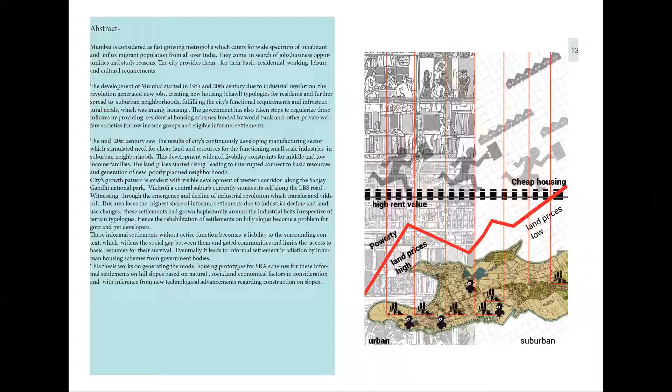The thesis works on generating model housing prototypes for SRA schemes for these informal settlements on hill slopes, based on natural, social, and economical factors, in consideration with inference from new technological advancement regarding construction on slopes.

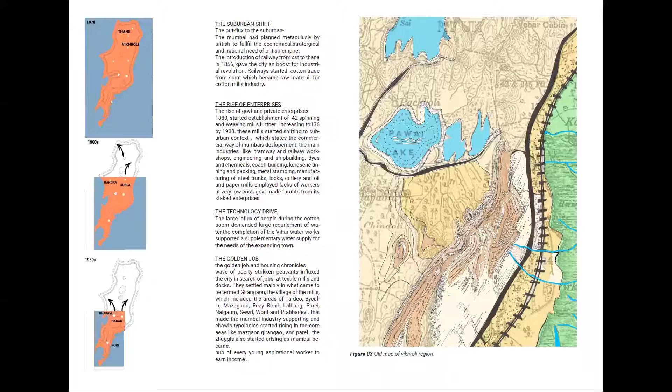The basic causes of shift are high land prices, cheap and better housing options in suburban contexts, and new small-scale industries in the Vikhroli-Mulund belt.

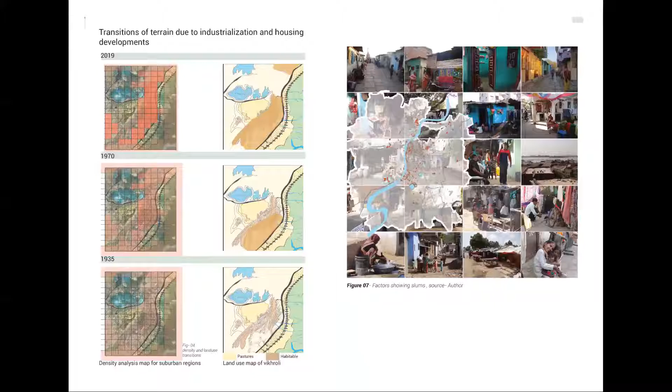The left side map shows the density of the Vikhroli region from 1935 to 2019. It shows a considerable amount of density increase.

The slums. While designing the slums, the following factors should be taken into consideration: society, work, family, habitable land, and ownership.

The SRA developments have their pros and cons. The cons are that the process is lengthy, with a lot of waiting, hence it's not up to market demand. The basic resources and facilities are not well thought out, and the residents are unable to maintain it after construction.

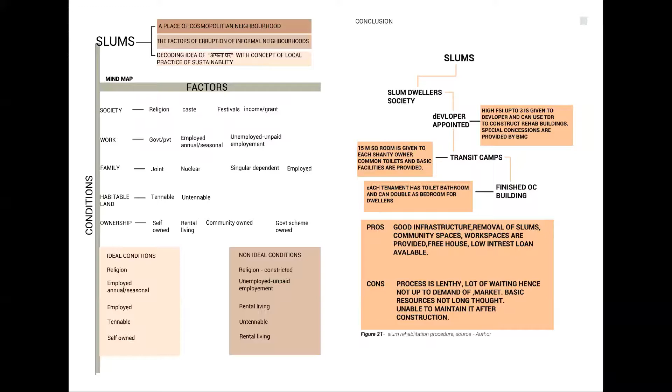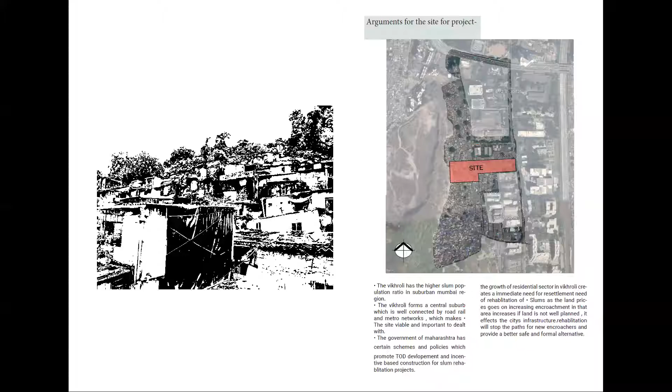The site is located in Vikhroli, which forms a good central suburb, well connected by road, rail, and metro networks, making the site viable and important to deal with. The government of Maharashtra has certain schemes and policies which promote TOD development and incentive-based construction in these areas.

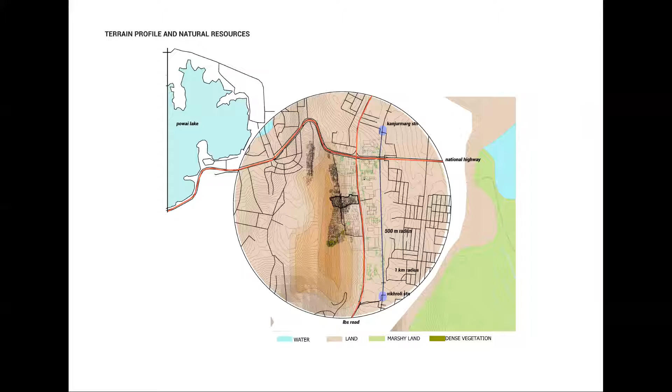The site is located on the foothills of the Mulund-Ghatkopar mountain belt, connected by the LBS road and to the EEH on the east and JVLR on the west. The site is situated between Kanjurmarg and Vikhroli, and is mainly a terraneous land which drains itself on the east side into the mangroves.

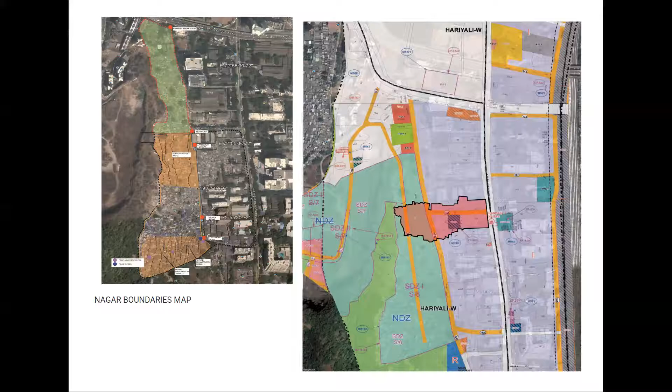The left side map shows the Nagar boundaries. The site has two Nagar boundaries coinciding: one is Ambewadi and the other is Suryanagar. The site has two types of reservation: one is industrial, in Suryanagar and Ambewadi, it is SDZ second zone.

Hence, the east side of the site has haphazard cutting of the mountain, but on the west side it is a kind of untouched land. The site drains into the eastern creeks of Kanjurmarg.

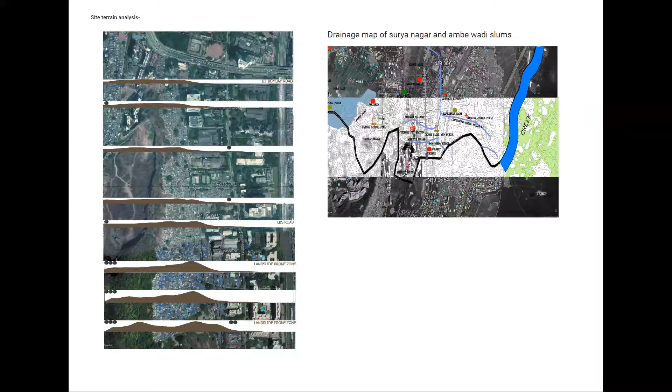The left side map shows the terrain study of the site, where it is divided into three kinds of slopes: the steep slope, the medium slope, and the shallow slope. The site ranges from 13 meters to 55 meters.

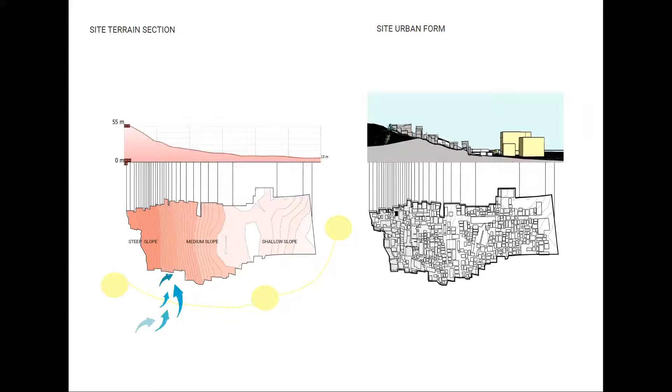The site has the slum typology in its present context. The left side diagram showcases how the site was a stone quarry, and after haphazard cutting of the stones, the site has become a hazardous kind of living condition for the slum dwellers on the other side of the mountain.

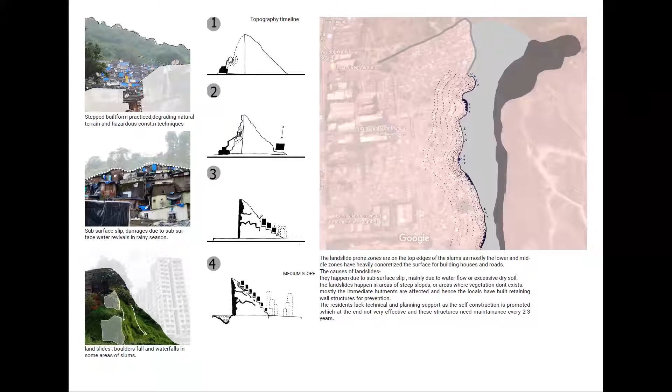The landslide-prone zones are on the top edges of the slums, and mostly the lower and middle zones of the slums are fully concretized. Hence, they do not experience any landslides, but the topmost slums do experience them. The site area is 4 acres.

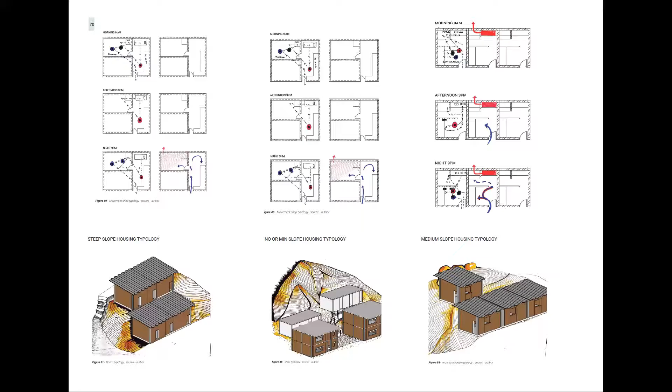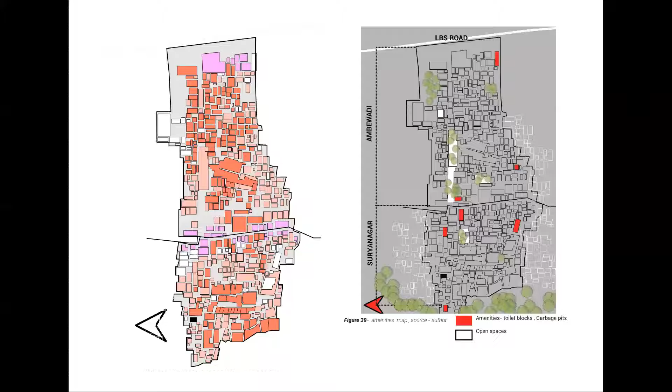The left side map shows the build form. It is mainly a G+1 kind of build form with small scale industries shown in purple. The other map shows the amenities and open spaces currently available on the site, and the religious context in the site.

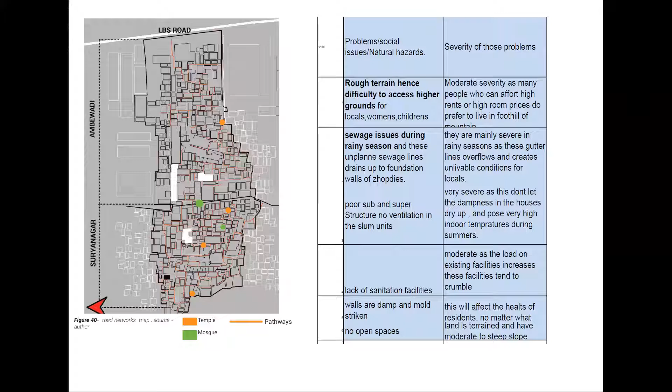Concluding, there are various problems like rough terrain, making it difficult to access higher grounds in the site. There are sewage issues, lack of sanitation facilities, the walls of existing structures of the slum dwellers are damp and mold stricken, and due to the dense typology, there are no open spaces presently available on the site.

The design statement: the program will provide 300 square feet tenements for 750 families, and the remaining tenements will be for sale purposes. As far as infrastructure facilities, it will provide approach roads, drainage system, landslide protection system, treatment plant, water segregation plant, parking, recreational grounds, commercial activities, shops, community center, etc.

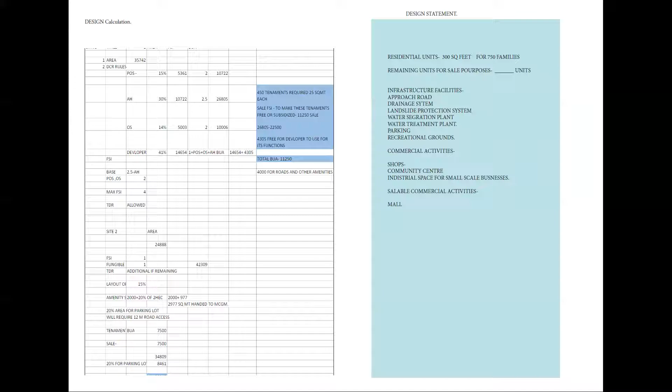The module development is based on terrain conditions. The module adapts according to the site. The key services are assembled and accessible through the site as main priority. The superstructure massing is designed to allow interim spacing and shared recreation spaces.

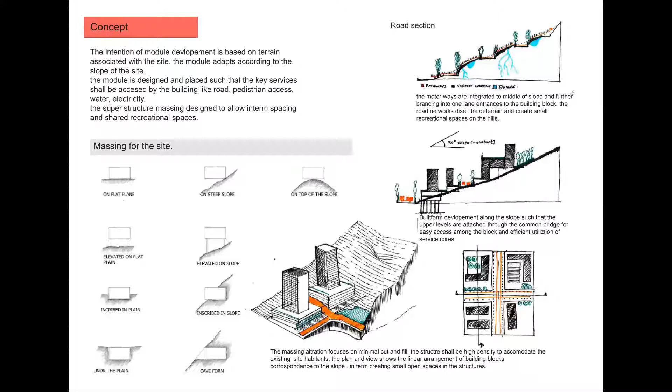The build form can have commercial spaces abutting the road, and an associated back typology which enables the building to respond to the terrain, creating multiple plinth levels in itself. The building structure connects road level with vertical circulation through the step form. The build form connects multiple road levels, enabling connection with the terrain and building at all levels.

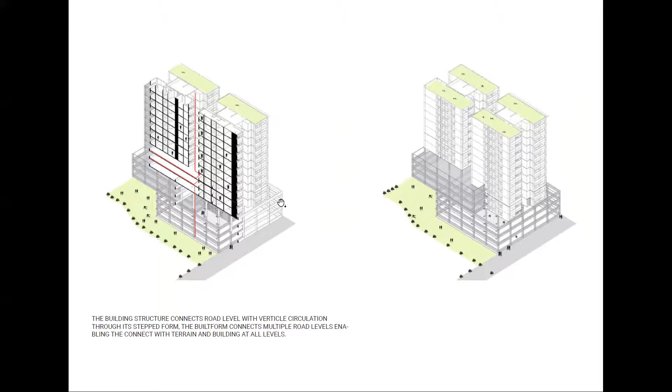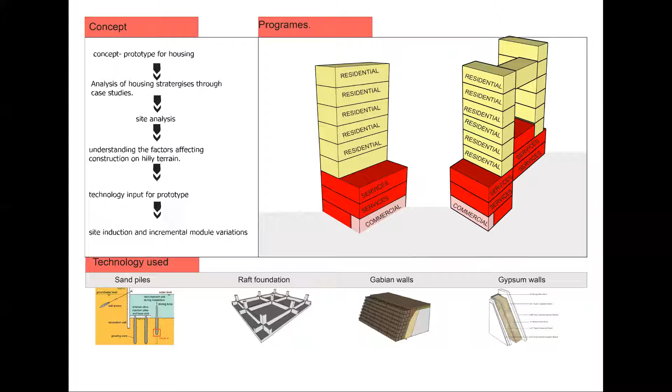The concept: the prototypal concept was basically commercial on the ground floors and a step pattern for the residential one. The technologies used were sand piling techniques, raft foundation, gabion walls, and gypsum walls.

First, the plinth design. These are the three buildings at lower, medium, and steep slope terrain. The above diagram explores the possibility of horizontal movement on terrained lands. The plinths are designed so that the minimum difference between two plinths is 1.5 meters and maximum 3 meters, where the 3 meter difference has the plinth adjoining the staircase block, and the 1.5 meter difference is covered by a designed staircase and ramp along the central spine of movement.

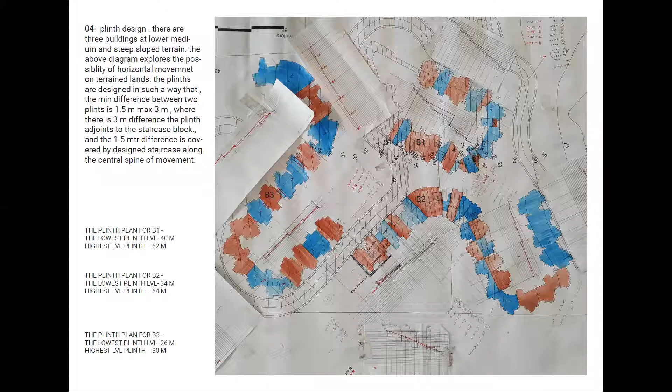For B1, the lowest plinth is 40 meters, the highest is 62 meters. The lowest plinth for B2 is 34 and highest is 64. The plinth for B3 is 26 and the highest is 30 meters.

Structures on an unstable slope with a uniform structural grid tend to deflect more from the load than a foundation on the same level. The above research paper concludes that a symmetrical level of stable foundation is preferable. In the above structure, the MF15 structure acts as the desirable option, with minimum deflection. These concepts can be used as structural input in my design problem.

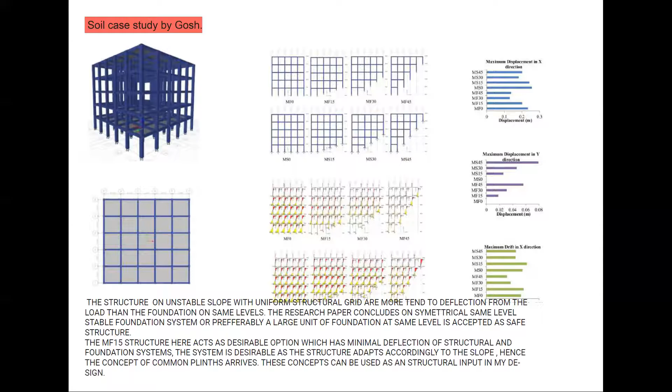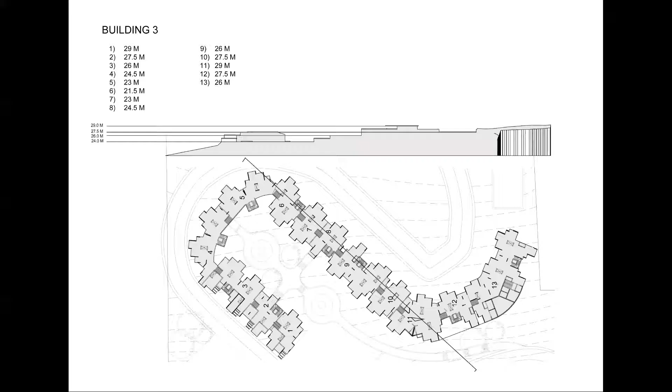Building 3 is situated on the low or minimum slope. Hence the building has an undulating plinth arrangement, starting from 29 meters to 24 meters, then to 26 meters, then again to 27 meters, and then to 26 meters. These small plinth divisions are due to the terrain conditions, as this building is situated on a low contour level. Hence the plinths are bigger compared to building 1.

Moving to building 2, it connects the medium slope terrain to the topmost slope terrain. It starts from 34.5 meters to 64.5 meters, connecting at 52 meters on the middle terrain, and at the top 64.5 meters.

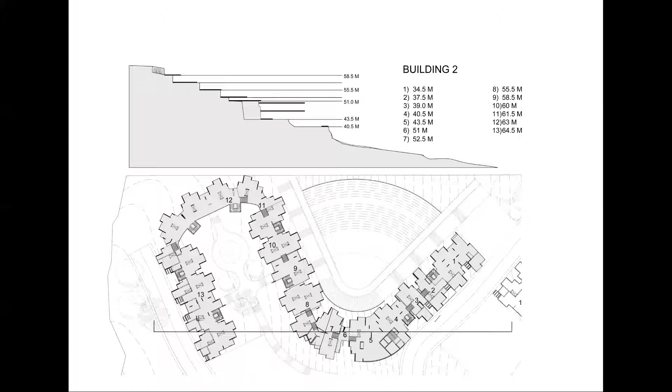This is the foundation plan for building B2, as the building is mainly situated on terrain land. It uses multiple kinds of foundations, like pile foundations placed at certain contour levels, which are in turn connected by the raft foundation for the plinth between the two pile foundations.

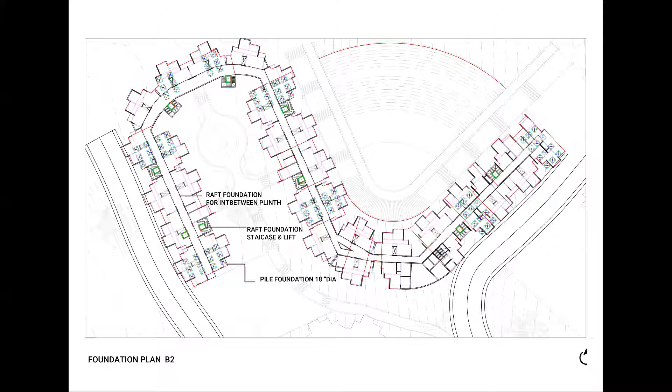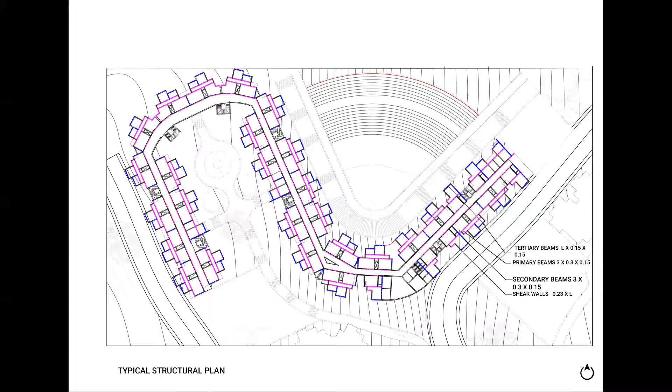Mainly, the primary beams run through the outer periphery of the structure. The secondary beams act as a connecting member to the primary beam and run along the inner circulation path, and the tertiary beams form windows and balconies for these small units.

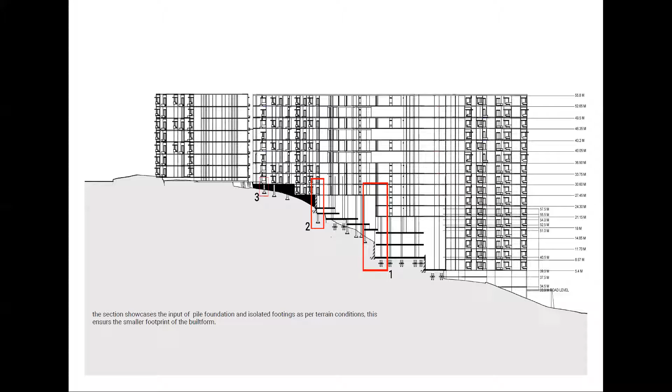This section showcases the input of pile foundation and isolated footing as per terrain conditions. This ensures a smaller footprint of the built form. The isolated footings are used in certain conditions, as these plinths are not at the same levels. Hence, a combination of raft foundation and isolated footing is practiced.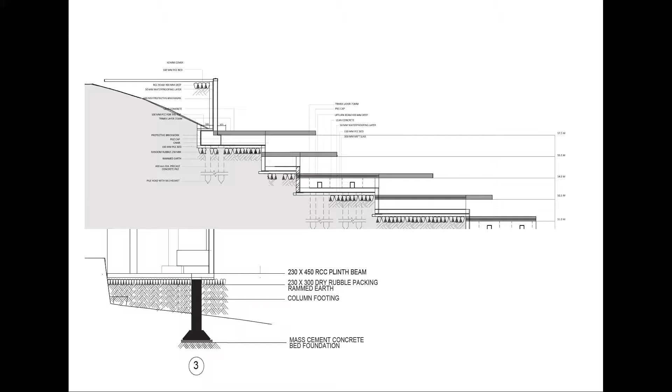The foundation is a stepped profile as the slope is very steep. The pile foundation on a raft is suitable, as these foundations are centric load enablers, since the piles are longer in the center than on the periphery. Hence, more load on residential floors can be carried compared with isolated footings.

This is the reason certain levels are piled while other levels use either raft or isolated footing.

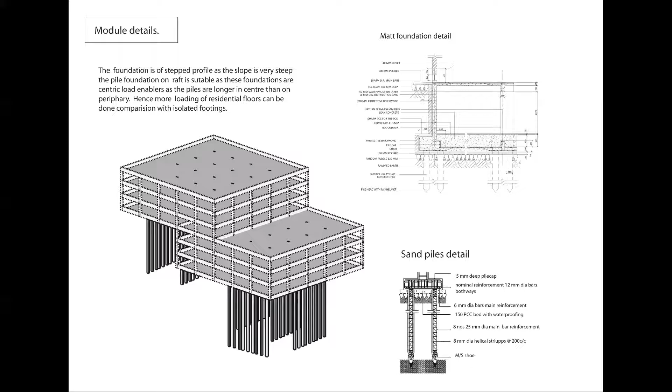These are the details of sand piles and mat foundation. This is the illustration showcasing the foundation system, consisting of micro pile foundation and combined footing.

The hexagonal pile caps carry load from the superstructure at plinth level, transferring it to the piles. The interim planes are connected by combined footing in some cases, and isolated footing in others.

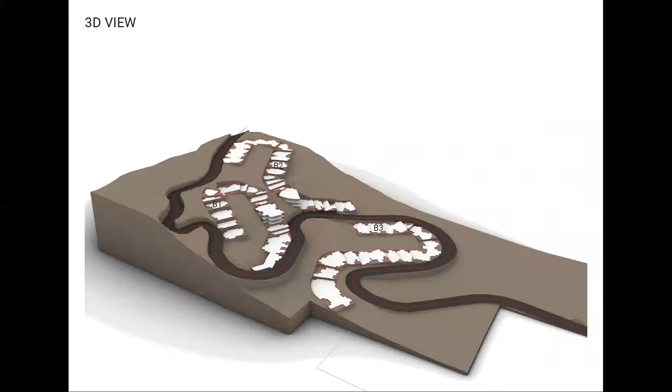This is a 3D view of the plinth levels for the buildings B1, B2, and B3.

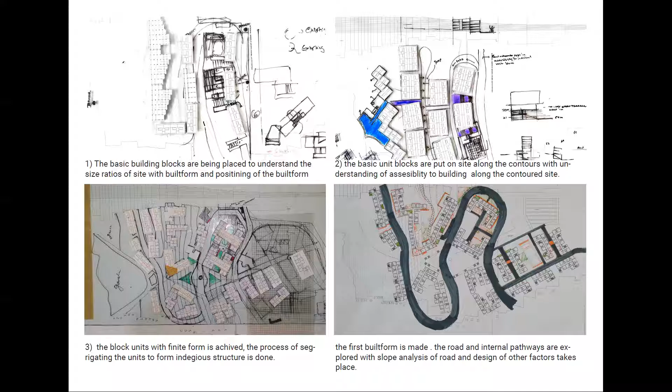Here, all the units form together, and this form corresponds to the contour, creating an extra road and building connection, enabling cross-level connectivity with informal pathways as well as formal pathways.

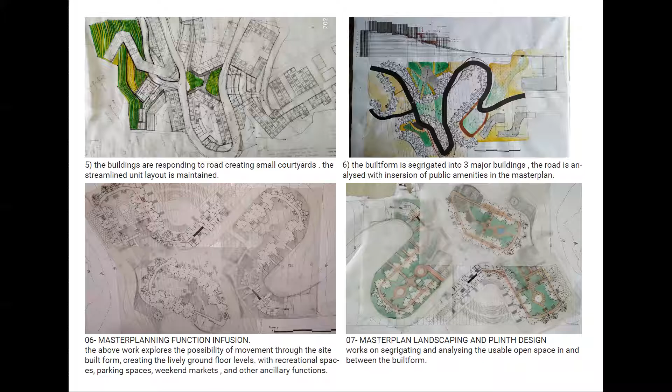In the seventh one, work on segregation, analysis, and usable open space in and between the build forms is done. This is the final master plan, showing liveliness at the ground floor level, where informal pathways navigate through the terrain.

These pathways connect with each other at different intervals, as the upper build forms connect the middle slope levels to the higher slope levels, while still being connected by road access.

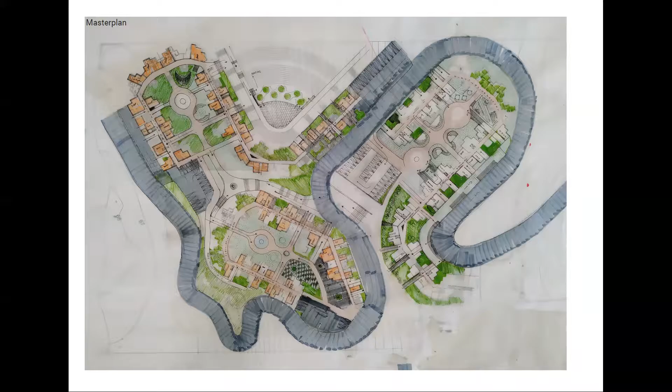Moving further, this is a master plan showcasing the important functions of the built form on the site, like urban farming, internal pathways, high-end residential settlements, public paths, residential buildings, sewage segregation zones, water treatment plants, and the weekend flea market.

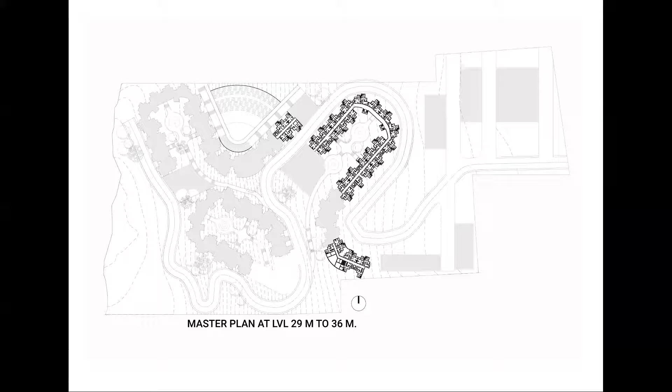Moving further, this master plan shows the slopes at a lower level from 29 meters to 36 meters, where building 3 exists and building 2 starts to develop.

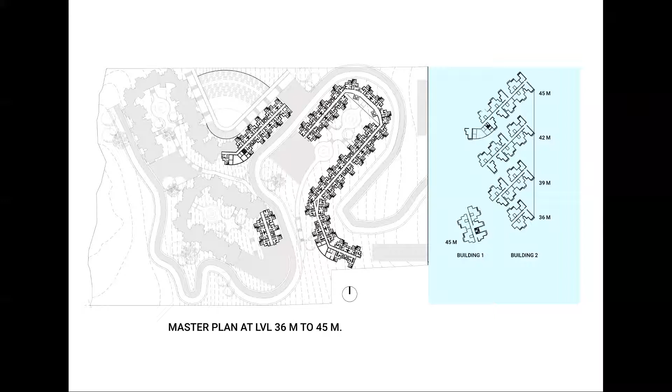This is a master plan from 36 meters to 45 meters, where the building form emerges, building 2 ceases, and buildings 1 and 2 try to develop at every 36, 39, 42, 45 level. All these cuts are along the main vertical corridors like staircases and lifts.

This is a master plan at the 45 to 54 meter level, where building 1 and building 2's successive modules are shown. This forms a middle slope terrain where the levels range from 45 meters to 54 meters, with relatively greater interim contour levels.

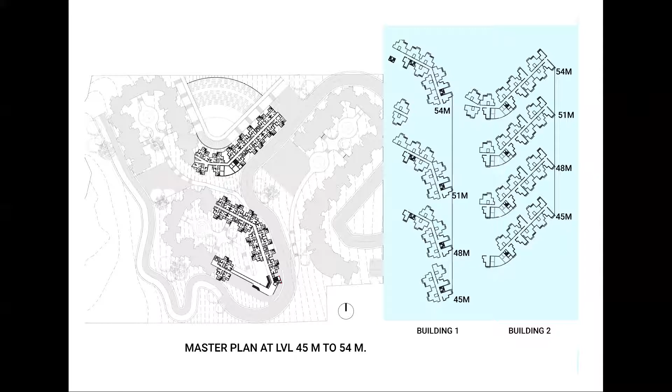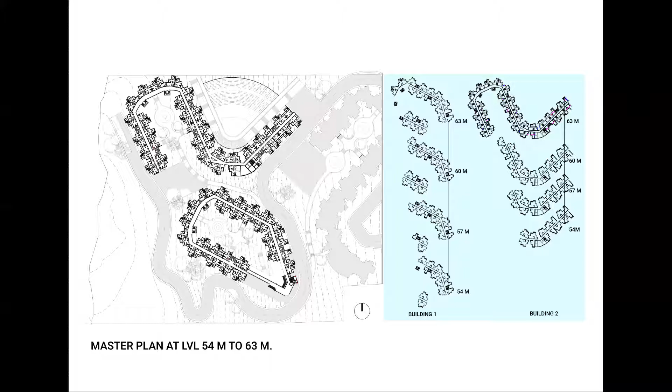Hence, the plinth levels here are relatively bigger than the upper ones but smaller than the lower building plinth levels. This is a master plan at the upper level, 54 to 63 meters, where building 1 and building 2 coincide to form a single level simultaneously.

This is a unit design. It is basically a 300 square feet unit which caters to different needs of the residents.

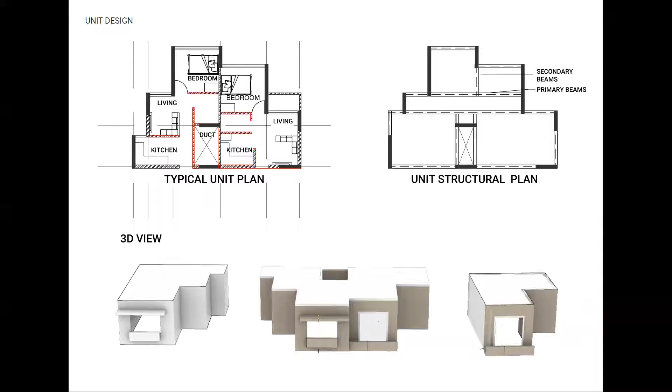The structural plan and its main members are the shear walls, and it has primary beams running along the periphery with secondary beams and tertiary beams giving rigid support to the structure.

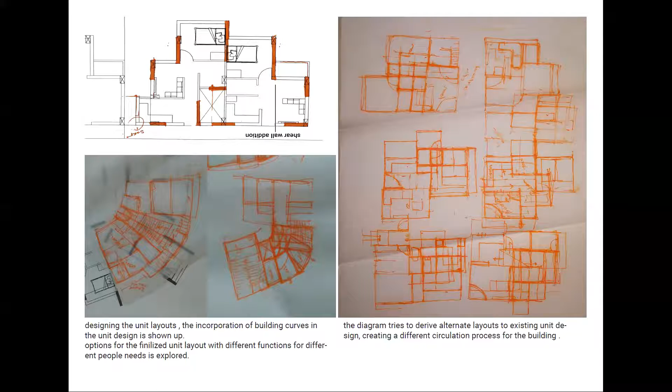Moving further, the unit design process. The process started with the form, tackling the curviness of the form with design layouts that incorporate the curves in a unit design that responds to various kinds of functions. The above diagram tries to derive alternate layouts of the existing unit design, creating a different circulation process for the building.

Moving further, the building basically uses a hybrid technique, as it uses cast-in-situ slabs and mat foundations, with the basic units as precast structures, which can be made offsite and transported here. This shows the connection between the slab and wall, the column and foundation, the beam, and the beam with the column.

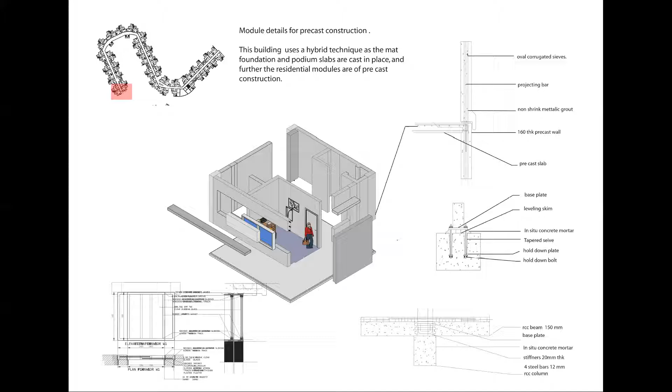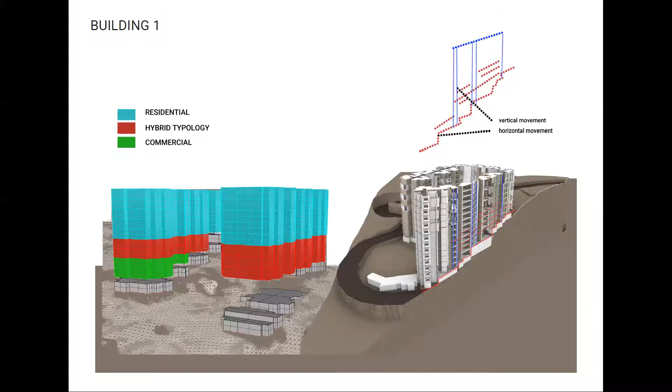This is building one, where the vertical and horizontal movement is shown on the right. The building consists of three kinds of zones: residential, hybrid, and commercial. As we go up, the commercial changes to hybrid, where commercial and residential coexist, then it comes to a common level where the residential level exists.

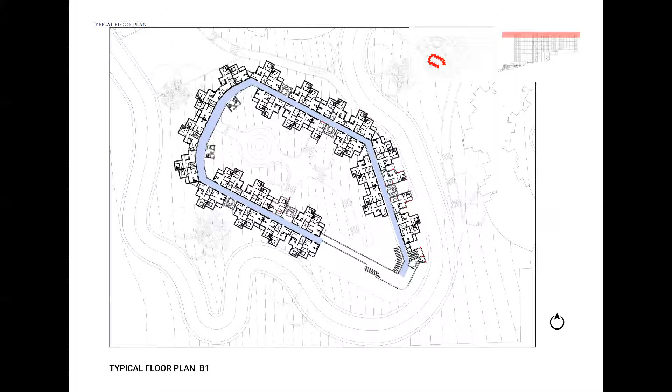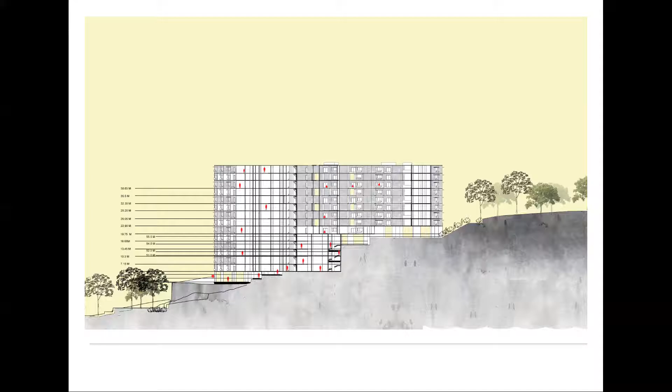This is the section where the building ranges from 7.15 meters to 38.65 meters, and typically the typical floor plan ranges from 26.05 meters to 38.65 meters.

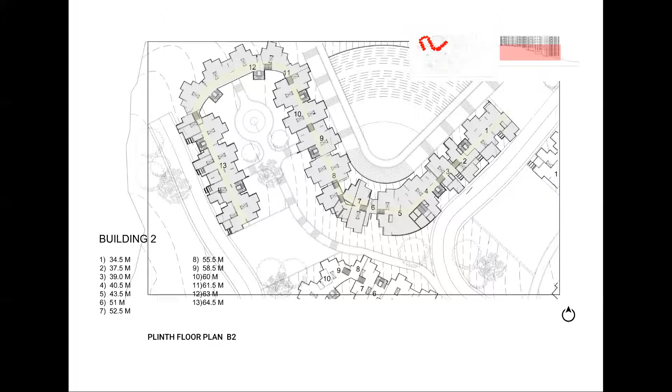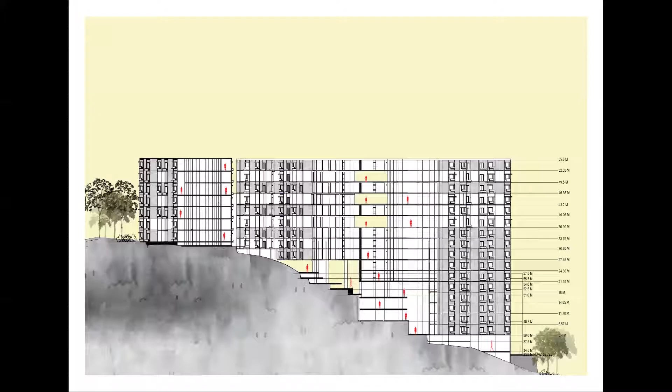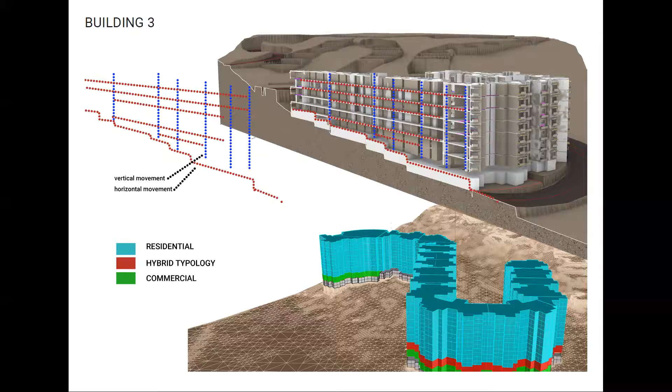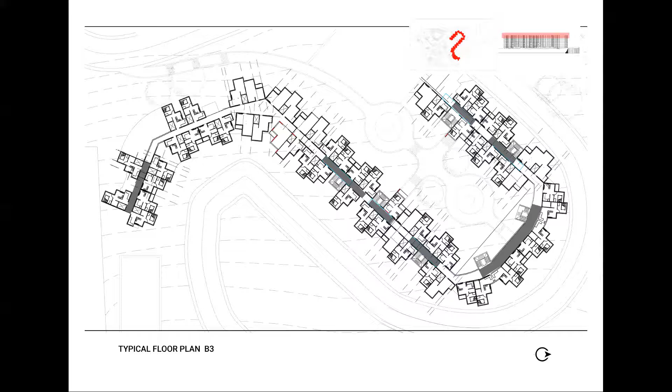Moving further to the typical floor plan, it is also a doubly loaded corridor, where the efficiency of the building form is analyzed, creating the typical floor plan and alternate floor plan. This reduces corridor space, creating urban regenerative spaces in between the built form for the residents, and enabling light and ventilation.

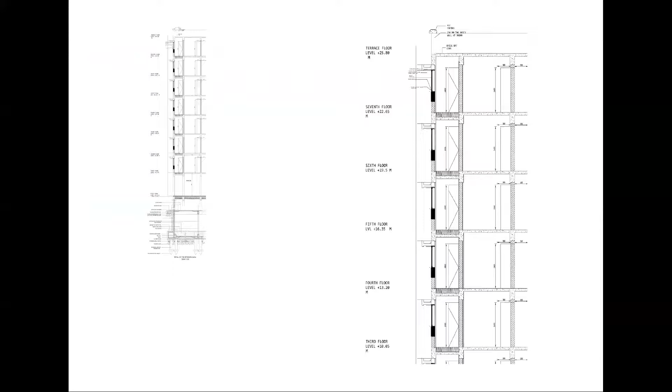This is a wall section, mainly cutting through the residential units and the pile foundation beneath.

Basically, it is cutting through the retaining wall kind of section, of building two, where the terrain conditions are such that there is a sudden cut and fill of 6 meters. So we need to input a retaining wall, then give a pile foundation, then give a raft foundation in further downward levels.